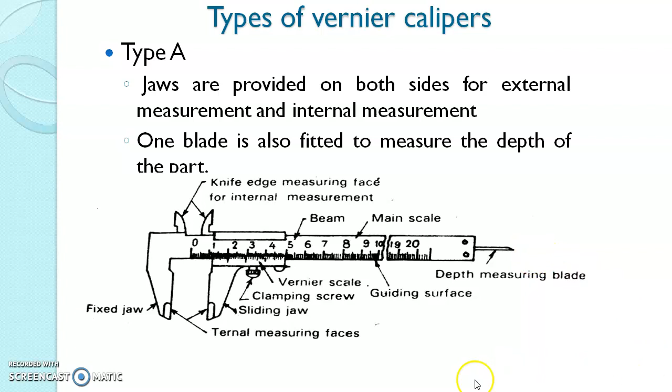So this is a picture of Type A vernier caliper. This is for external measurement or outer dimensions, and the top jaw is used for measuring internal dimensions.

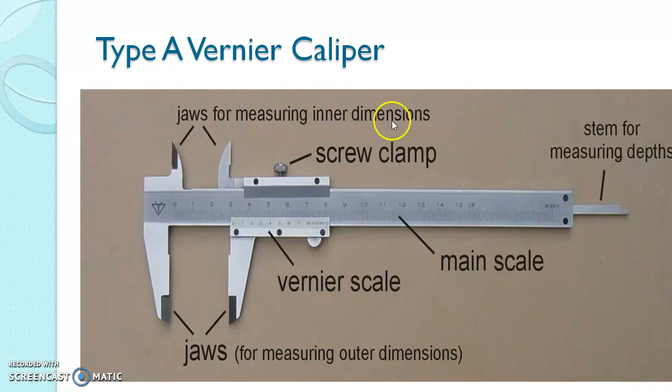Next, Type B vernier caliper. Jaws are provided on the same side. The internal jaw is used for external measuring faces, and the outer external measuring faces are used for external measurements. They are on the same side, but no provision is available for measuring depth.

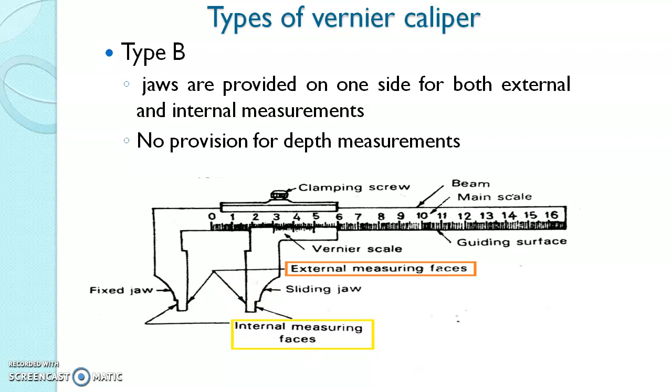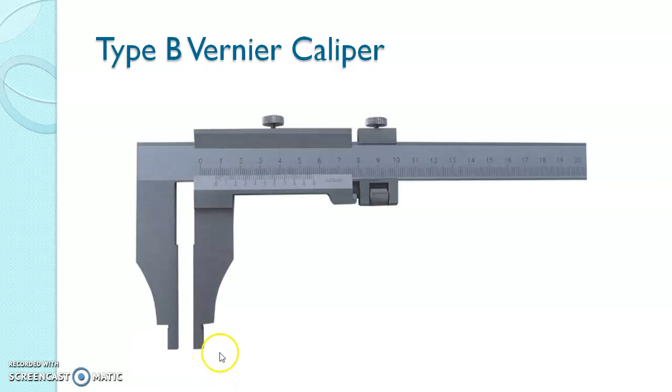This type is called Type B vernier caliper. This picture shows Type B vernier caliper. No depth measurement here. The internal face is used for external measurements, and the external face is used for internal measurements.

Then Type C vernier caliper. Jaws are provided on both sides, very similar to Type B vernier caliper. Internal faces are used for external measurement, and external faces are used for internal measurement.

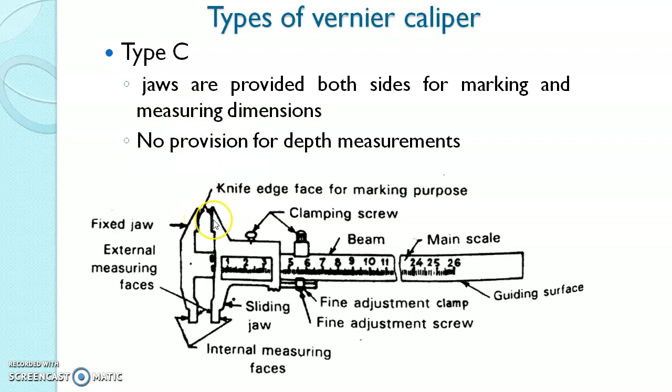In addition, there is a knife edge face for marking purposes. You can set the measurement and mark it using this side. This type is called Type C vernier caliper. No provision is available for depth measurement.

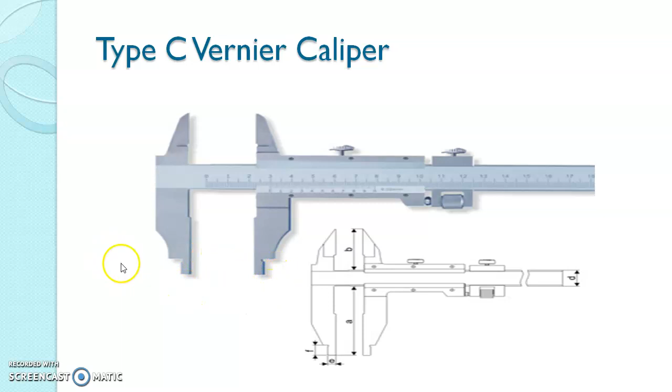This is a picture of Type C vernier caliper. The top jaw is used for marking purposes. The internal jaw is used for external measurements, and the external jaw is used for internal measurements.

The next vernier type is called the vernier height gauge. This gauge can take vertical measurements. In the vernier height gauge, this is a main scale or graduated scale, and it is held firmly vertical, perfectly at 90 degrees.

It has a base which is ground and has the highest accuracy. It is like a surface plate. The base of the vernier height gauge is like a surface plate - it is finely ground and lapped to get very high accuracy.

The job is placed between the base and the graduated sliding scale or vernier scale. This vernier scale is sliding - a slider moves, and the job is placed between the slider and the base.

There are two clamps: one is a clamping screw, which is adjusted and screwed to tighten the workpiece and the slider, and the fine adjustment screw is used for moving the slider in fine movements.

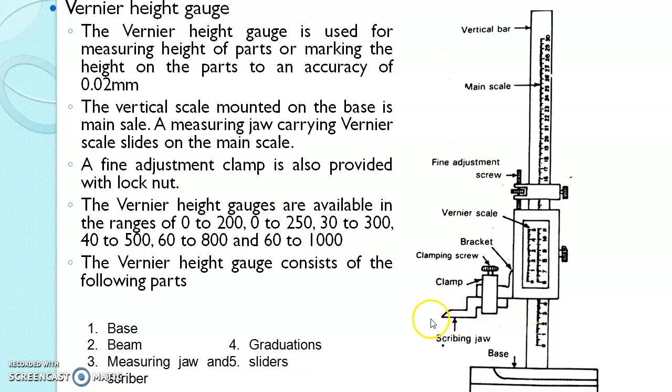This is a scriber. For marking purposes, you can use this scriber.

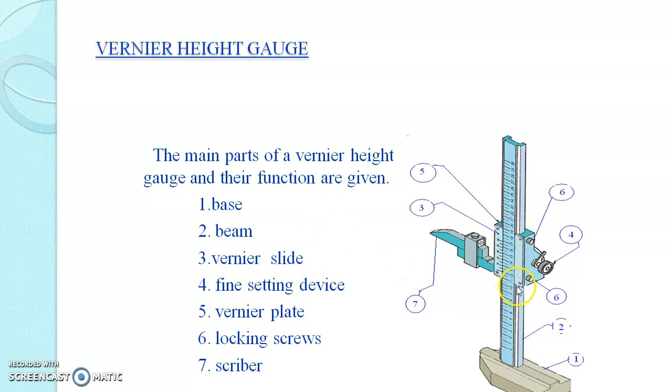Then the vernier height gauge - the picture of the vernier height gauge is shown here, with base, beam, measuring jaw, graduation, and slider all shown here.

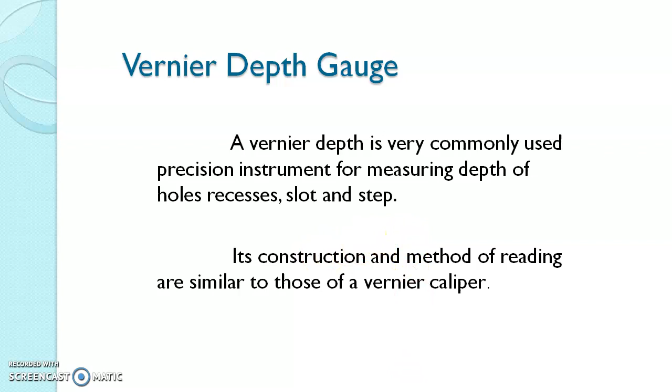Then the vernier depth gauge - it is a precision instrument used for measuring the depth of holes, recesses, slots, and steps. It is very similar to the vernier caliper, and its working principle is very much similar to the vernier caliper.

It is placed on the surface plate or anvil, where the distance to be measured, or the depth, is placed on the workpiece whose surface is ground and lapped to very high accuracy.

It is different from the vernier height gauge. In the vernier height gauge, the main scale is fixed, whereas in the vernier depth gauge, the main scale is moving and the vernier scale is fixed. This is the main difference between the vernier depth gauge and the vernier height gauge.

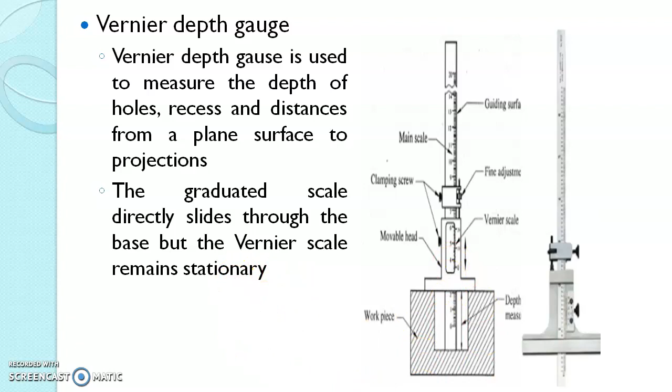But the working principle is the same as that of the vernier caliper. The picture of the vernier depth gauge shows the base, graduated beam, clamping screw, fine adjustment screw mechanism, and a vernier scale.

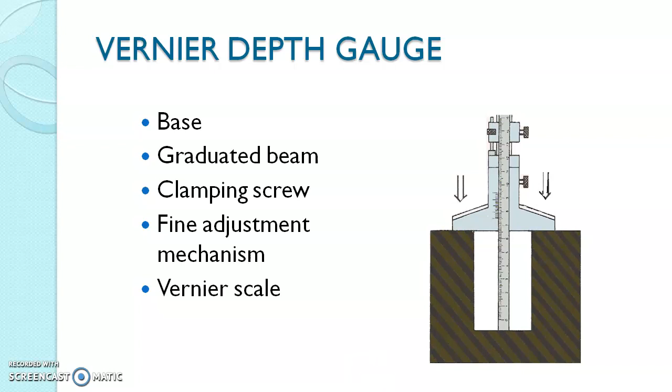Then the micrometer - it is also a linear measurement instrument.

It can measure an accuracy of up to 0.01 mm. Micrometer is used to take outside measurement, so it is called outside micrometer. Micro means 1 by 1000, so it can measure an accuracy of up to 1 by 1000 mm. So it got the name micrometer.

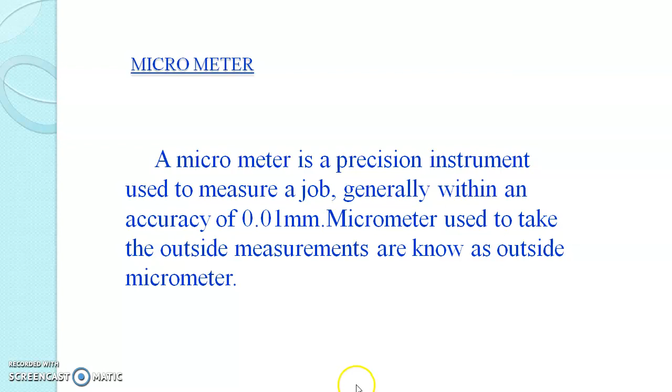It is based on the screw mechanism. When you rotate a screw and nut, the nut will have linear movement. There is a rotation, and out of the rotation you can get the linear movement. The rotary motion is converted into linear movement in the screw nut mechanism.

The first micrometer was invented by William Gascoigne in Yorkshire, England in the 17th century, and was used in telescopes to measure angular distances between stars. The commercial micrometer was released by Brown and Sharpe Company in 1867.

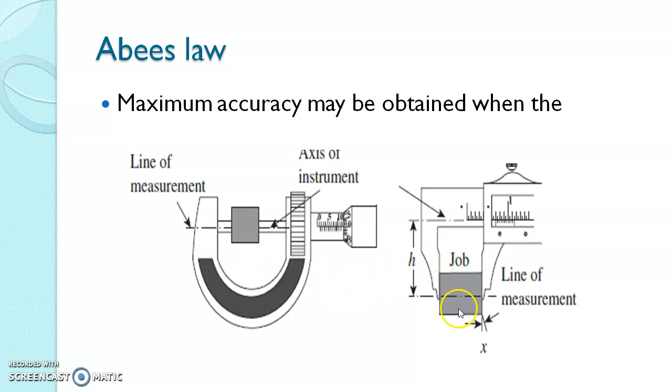Micrometer is used in mechanical engineering for precisely measuring thickness of blocks, outer and inner diameters of shafts, and depths of slots. Micrometers have several advantages over other types of measuring instruments like vernier caliper. A micrometer generally provides greater precision than a caliper, but can measure only a small range of lengths.

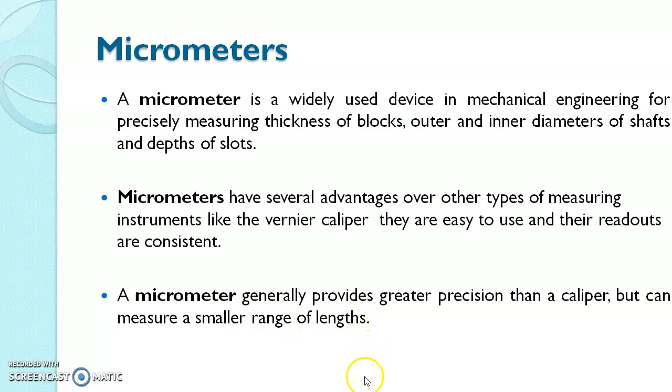The micrometer works on the screw mechanism. The spindle is connected to the nut, forming a nut and screw mechanism. When you rotate the thimble, this movement is converted into fine linear movement of the spindle.

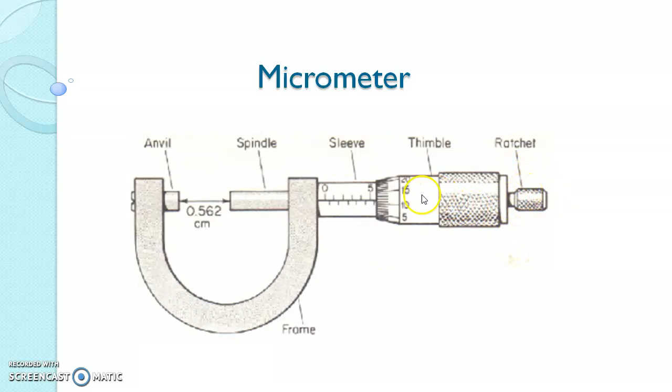This is the anvil, this is the spindle, this is the sleeve. The sleeve has the main scale, and the thimble has graduations. This is the ratchet.